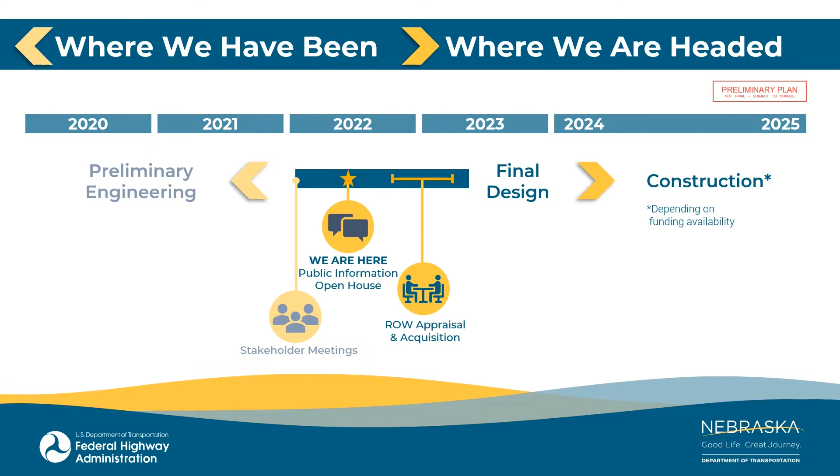Identified as US-34 North and South Seward, the proposed project would reconstruct approximately 1.1 miles and resurface 0.4 miles of N15, also known as 6th Street. The reconstruction segment would build a new concrete roadway starting just south of the Burlington Northern Santa Fe Railroad crossing and extend north to just beyond the intersection of N15 and North Avenue. This segment of the project would also include reconstruction of the curb inlets and storm sewer, pedestrian facilities, and updating or replacing roadway lighting and traffic signals. Existing utilities would be reconstructed or relocated as needed.

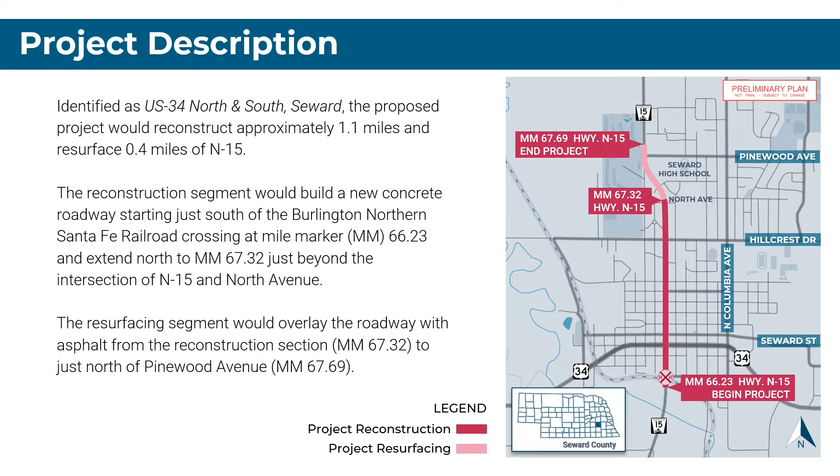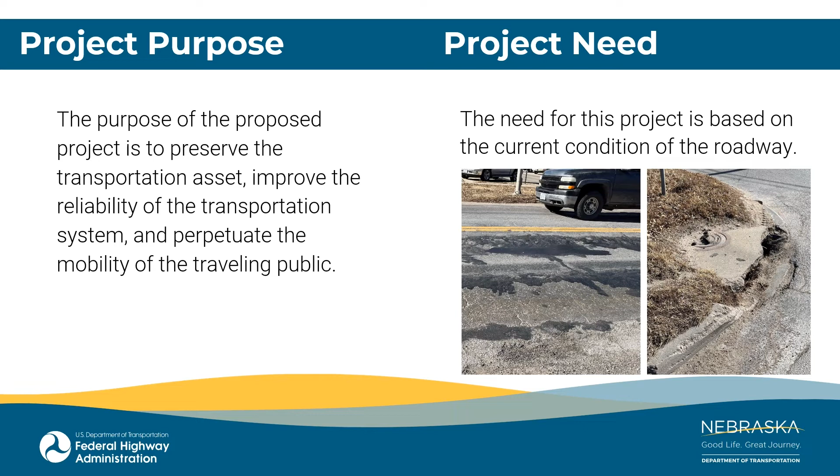The resurfacing segment would overlay the roadway with asphalt from the reconstruction section to just north of Pinewood Avenue. The planned construction in the resurfacing segment would consist of concrete pavement repairs and resurfacing the roadway and surface shoulders where present. The purpose of the proposed project is to preserve the transportation asset, improve the reliability of the transportation system, and perpetuate the mobility of the traveling public. The need for this project is based on the current condition of the roadway.

Now we'll be walking through the proposed improvements on N15. Typical sections are a cross-section or a driver's perspective when looking at the roadway. These sections represent a driver moving through the corridor from south to north. From Ash Street to South Street, N15 would be fully reconstructed as an urban curb and gutter section. A single lane of traffic would be constructed in each direction, as well as new sidewalks on both sides of the street. The existing elevated sidewalk on the east side would remain in place. Traveling lanes are shown here in blue. The gold represents an imprinted concrete with a brick pattern. The proposed roadway would be 32 feet wide from back of curb to back of curb as it is today.

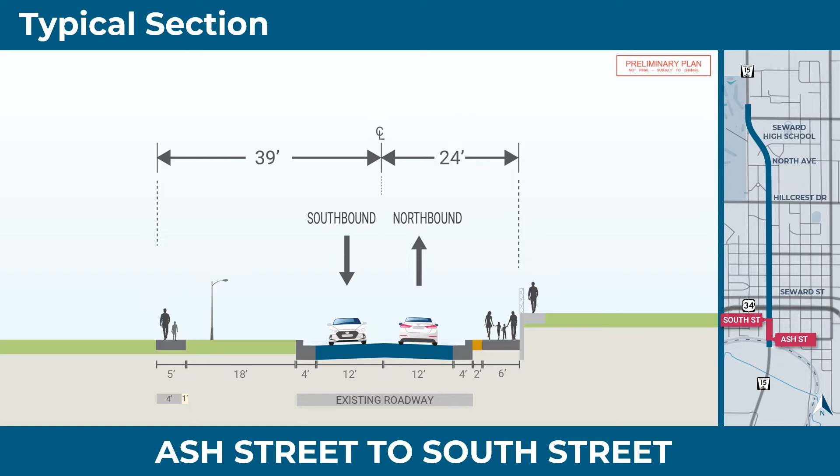From South Street to Jones Bank or City Hall, N15 begins to widen to allow for a turn lane in the following section. A single lane of traffic would be constructed in each direction as shown in blue. Existing sidewalks would be maintained as shown in light gray. The proposed roadway would be 55.5 feet wide from back of curb to back of curb as it is today. Parking would be included as it is today. However, the reconfiguration of parallel parking would eliminate 3 stalls within this section, 1 stall on the west and 2 stalls on the east side of the street.

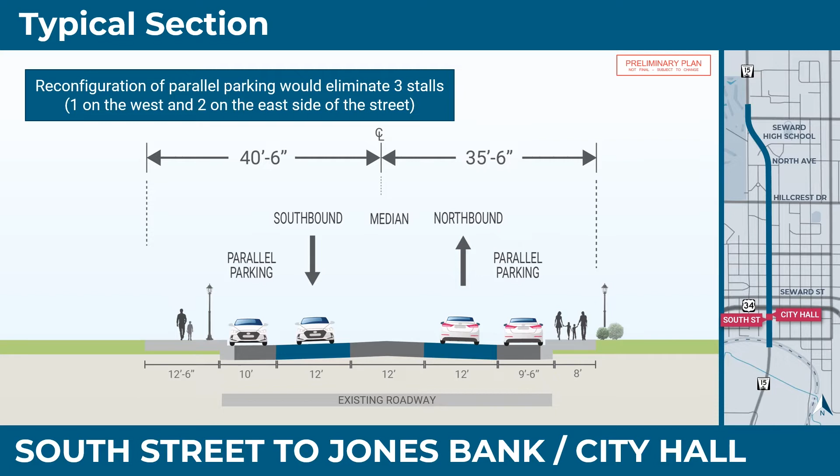From Jones Bank or City Hall to US-34, a left turn lane would be incorporated. A single lane of traffic would be constructed in each direction as shown in blue. The existing right turn lane would be eliminated and, in general, parallel parking on both sides of the street would be included as it is today. Existing sidewalks would be maintained as shown in light gray. The proposed roadway would be 64 feet wide from back of curb to back of curb as it is today.

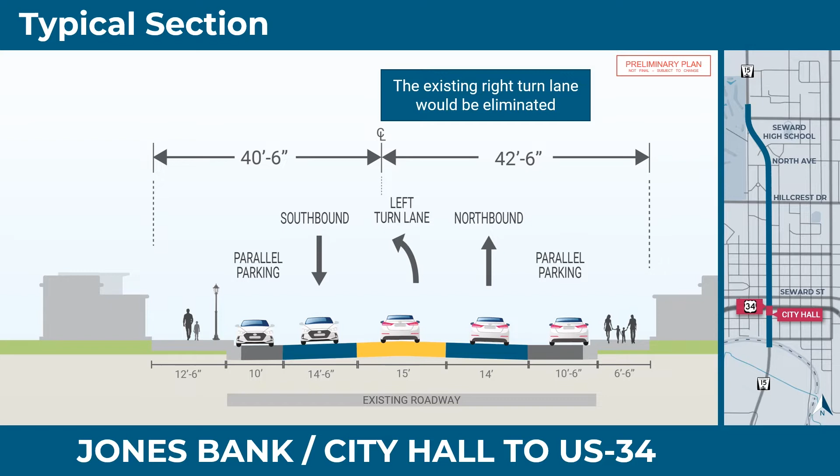From US-34 to Seward Street, a left turn lane would be incorporated. A single lane of traffic would be constructed in each direction as shown in blue. On the west, parallel parking would be included as it is today. On the east, parallel parking would be converted to diagonal parking. Existing sidewalks would be maintained as shown in light gray. The proposed roadway would be 68 feet 4 inches wide as it is today.

Configuration of parallel parking would eliminate 1 stall on the west side of the street. Diagonal parking would provide the same number of stalls on the east side of the street.

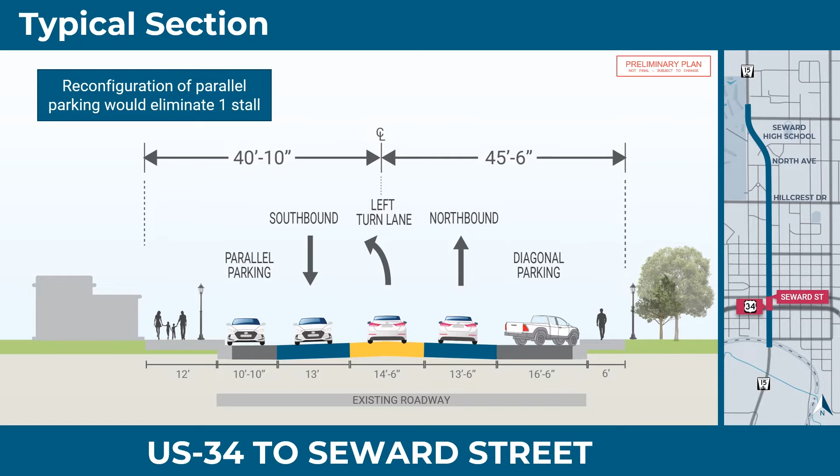From Seward Street to Jackson Avenue, a left turn lane would be incorporated. A single lane of traffic would be constructed in each direction as shown in blue. Existing sidewalks would be maintained as shown in light gray. The proposed roadway would be 54 feet 8 inches wide from back of curb to back of curb as it is today. Parking would be included as it is today.

However, reconfiguration of parallel parking would eliminate 3 stalls, 1 stall on the west and 2 stalls on the east side of the street.

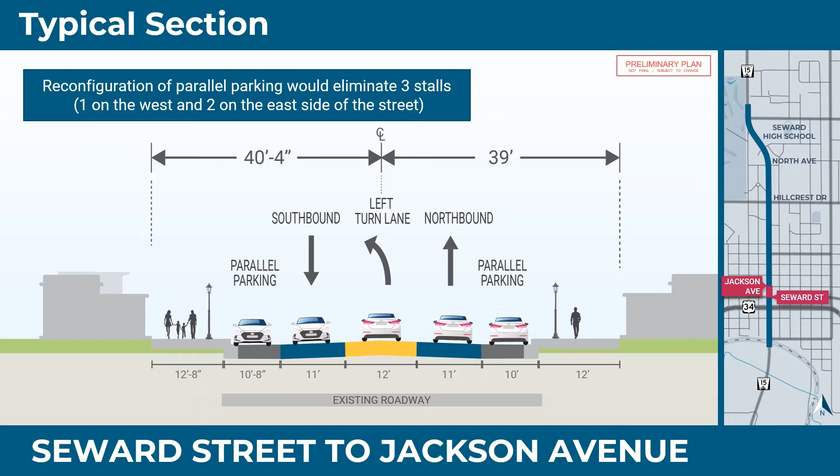From Jackson Avenue to Hillcrest Drive, N15 would be fully reconstructed as an urban curb and gutter section. A single lane of traffic would be constructed in each direction with the addition of a common left turn lane. New sidewalks would be constructed on both sides of the street.

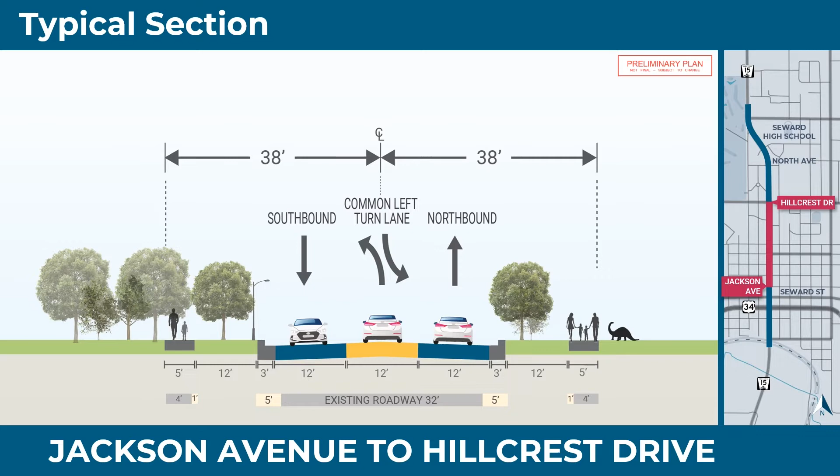The proposed roadway would be widened from 32 feet to 42 feet from back of curb to back of curb. This is an increase of 5 feet on each side of the road. This is to accommodate the common left turn lane. Essentially, proposed improvements would be contained within the footprint of the existing sidewalks.

From Hillcrest Drive to North Avenue, N15 would be fully reconstructed as an urban curb and gutter section. A single lane of traffic would be constructed in each direction with the addition of a common left turn lane. New sidewalks would be constructed on both sides of the street. The existing parallel parking would be eliminated to accommodate the common left turn lane.

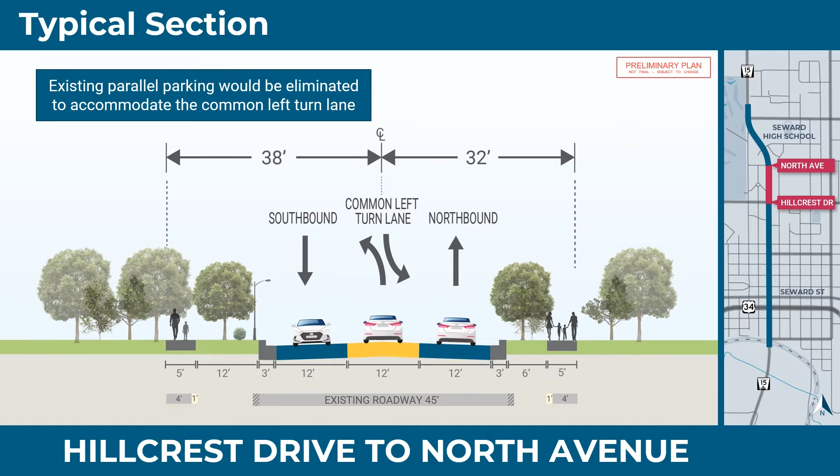The proposed roadway would be reduced from 45 feet to 42 feet from back of curb to back of curb. That is an elimination of 1 1/2 feet on each side of the road. This is to match the adjacent sections. From North Avenue to the end of the project, the roadway would be resurfaced within the existing roadway footprint.

Now we will walk through the plan view of the proposed improvements for N15. A plan view is a bird's eye view of the roadway. Note that north is to the right. Again, we'll be moving through the corridor from south to north. The legend is shown in the upper left-hand corner.

Proposed reconstruction for pavement and drives are shown in red. Proposed resurfacing for pavement is shown in pink. Proposed sidewalk improvements are shown in yellow. Proposed imprinted concrete with a brick pattern is shown in gold. Proposed green space additions are shown in lime green. Proposed stormwater system improvements are shown in gray, and proposed tree removals are noted along the project.

From Ash Street to US-34, N15 would be fully reconstructed as an urban curb and gutter section. A single lane of traffic would be constructed in each direction. A northbound left turn lane would be incorporated at the intersection with US-34. Parallel parking would be available between South Street and US-34 on both sides of the street, and the stormwater drainage system would be improved.

New continuous LED roadway lighting would be installed from Ash Street to South Street, and from South Street to US-34, the existing ornamental lighting would be used in place. The traffic signals at the intersection of N15 and US-34 would be modified.

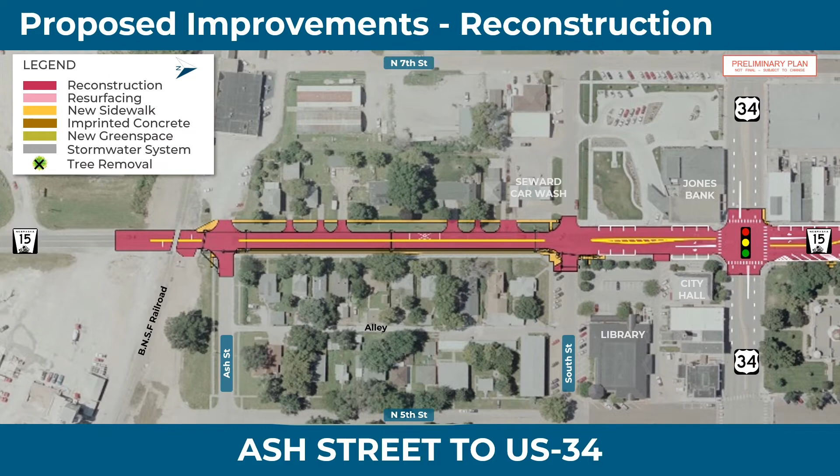From US-34 to Roberts Street, N15 would be fully reconstructed as an urban curb and gutter section. A single lane of traffic would be constructed in each direction. Northbound left turn lanes would be incorporated at the N15 intersections with Seward Street and Jackson Avenue. Southbound left turn lanes would be incorporated at the intersections of US-34 and Seward Street. A common left turn lane would be incorporated north of Jackson Avenue.

On the west side, parallel parking would be available between US-34 and Jackson Avenue. On the east side, diagonal parking would be available along the Courthouse Square. Parallel parking will also be available between Seward Street and Jackson Avenue on the east. The existing driveway access at Fastmart would be reconfigured as shown by the addition of new green space and imprinted concrete. The stormwater drainage system would be improved.

However, the existing stormwater system would be used in place between US-34 and Seward Street. The existing ornamental lighting would be used in place from US-34 to Jackson Avenue, and new continuous LED roadway lighting would be installed north of Jackson Avenue. Traffic signals at the intersection of N15 with Seward Street would be removed and new signals installed.

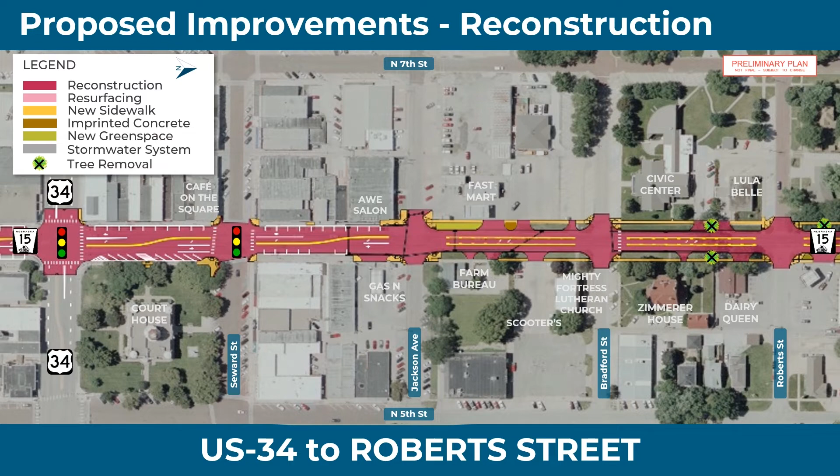From Roberts Street to Cedar Street, N15 would be fully reconstructed as an urban curb and gutter section. A single lane of traffic would be constructed in each direction. A common left turn lane and new continuous LED roadway lighting would be incorporated through this entire section. The existing driveway access near Subway would be reconfigured as shown by the addition of new green space. The stormwater drainage system would also be improved, including improvements to Cedar Street Detention Pond.

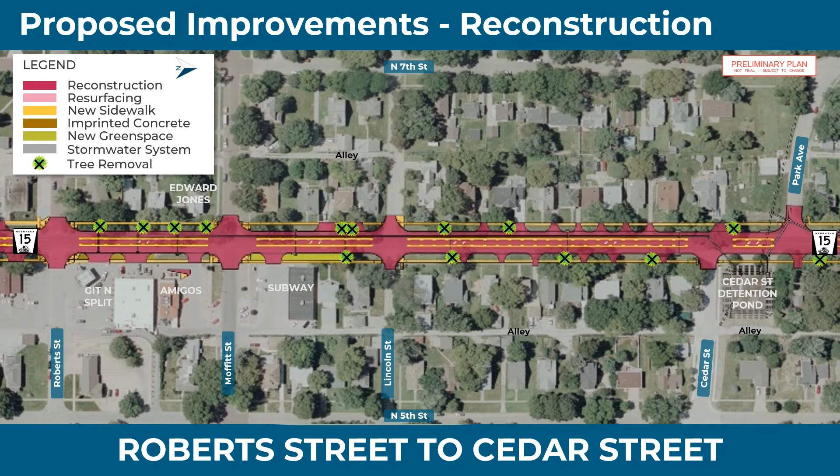From Cedar Street to 6th Avenue, N15 would be fully reconstructed as an urban curb and gutter section. A single lane of traffic would be constructed in each direction. A common left turn lane and new continuous LED roadway lighting would be incorporated throughout this entire section.

The existing parallel parking from Hillcrest Drive to North Avenue would be eliminated. Green space would replace existing concrete as needed in areas between the sidewalk and back of curb. This is shown by the addition of new green space on the east side of 6th Street north of Hillcrest Drive. The stormwater drainage system would also be improved.

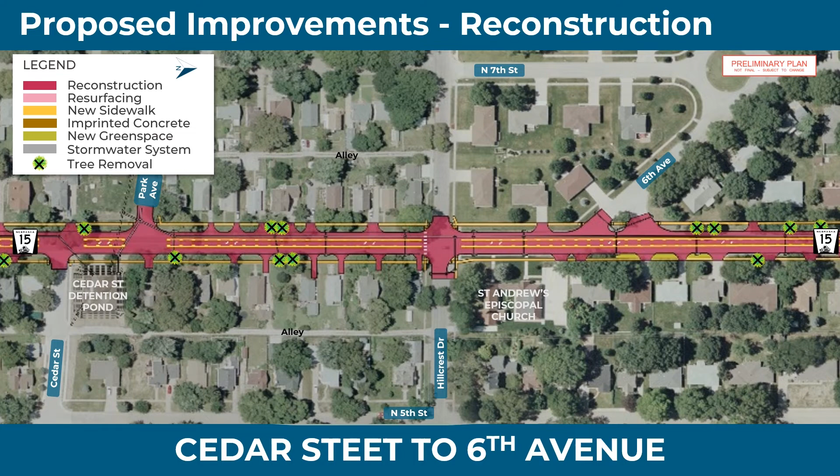From 6th Avenue to Northern Heights Drive, the fully reconstructed section continues to North Avenue, including a single lane of traffic in each direction and a common left turn lane, and new continuous LED roadway lighting would be incorporated throughout this entire section. The stormwater drainage system would also be improved south of North Avenue.

From North Avenue to the end of the project, the existing roadway would be resurfaced within the existing roadway footprint. Pavement would be restriped to accommodate a southbound left turn lane at North Avenue and Northern Heights Drive, which is the entrance to Seward High School. Pavement would be restriped to accommodate a northbound left turn lane at Circle Drive. ADA curb ramps would be constructed along the resurfacing portion of the project.

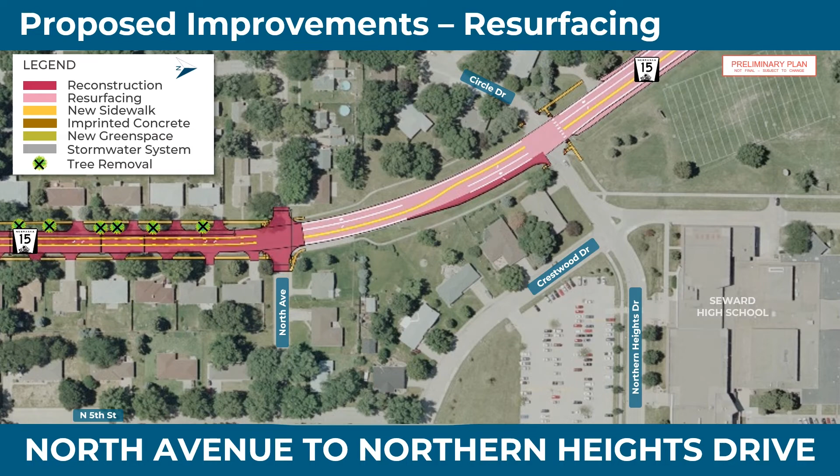Pavement would be restriped to accommodate a northbound left turn lane at North 8th Street. A right turn lane onto Pinewood Avenue would be provided for northbound traffic. New continuous LED roadway lighting would be incorporated to Pinewood Avenue.

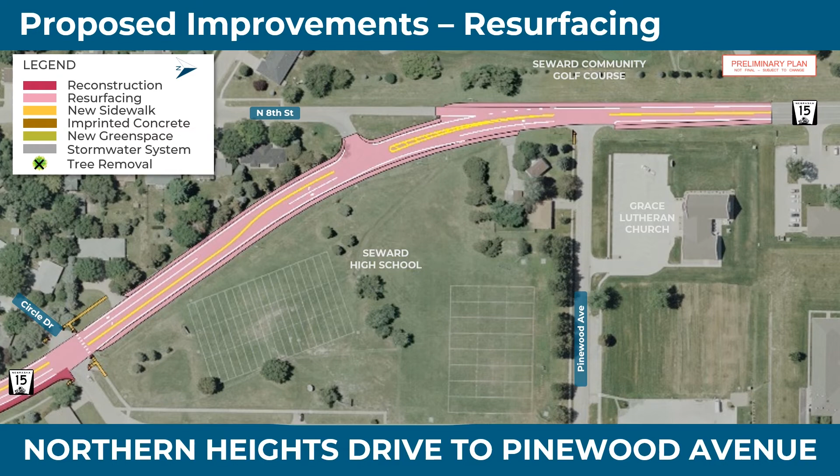Phase 1 construction from Ash Street to US-34 would be completed first to allow N15 south of US-34 to be reopened to traffic for the remainder of the project construction. A designated detour for highway traffic south of US-34 would be provided utilizing Izaak Walton Road, 294th Road, and US-34.

Northbound N15 traffic would be directed to take Izaak Walton Road west to 294th Road, then north to US-34, and then east on US-34 before continuing north on N15. Southbound N15 traffic would be directed to take US-34 west to 294th Road, then south to Izaak Walton Road, then east on Izaak Walton Road before continuing south on N15.

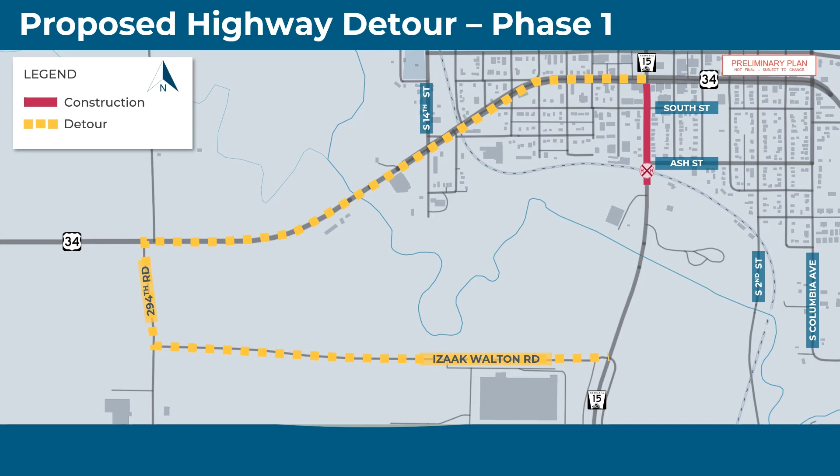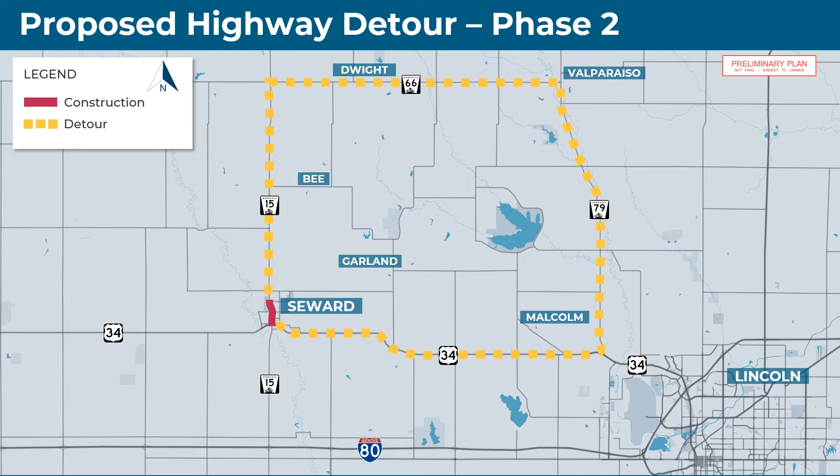The designated detour for highway traffic north of US Highway 34 would be provided using US 34, Nebraska Highway 79, and Nebraska Highway 66. Highway traffic would be detoured by US 34 on the south, N79 on the east, and N66 on the north. During Phase 2 construction, local southbound traffic would be maintained on N15 north of US 34.

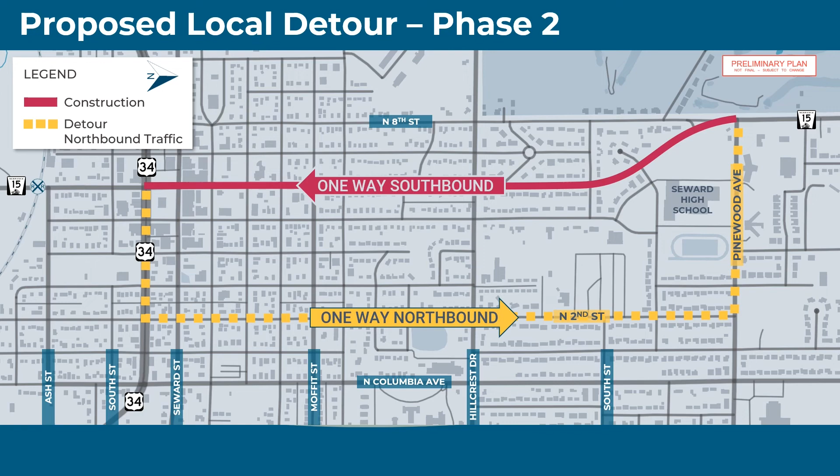On this slide, note that north is to the right. A designated detour for local northbound traffic north of US 34 would be provided utilizing 2nd Street between US 34 and Pinewood Avenue. Northbound N15 traffic would be directed to take US 34 east to 2nd Street, then north to Pinewood Avenue, and then west on Pinewood Avenue before continuing north on N15.

Now, we will discuss historic properties. Section 106 of the National Historic Preservation Act requires federal agencies to consider the effects of actions on historic properties. That can include any prehistoric or historic district, site, building, structure, or object eligible for or already listed on the National Register of Historic Places.

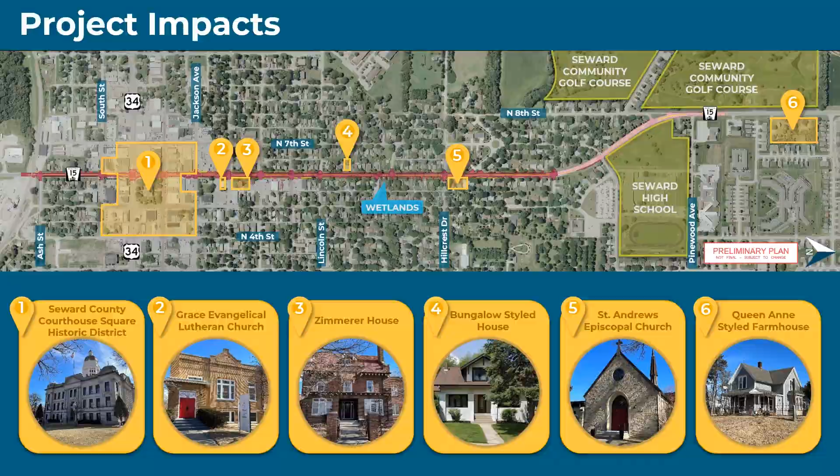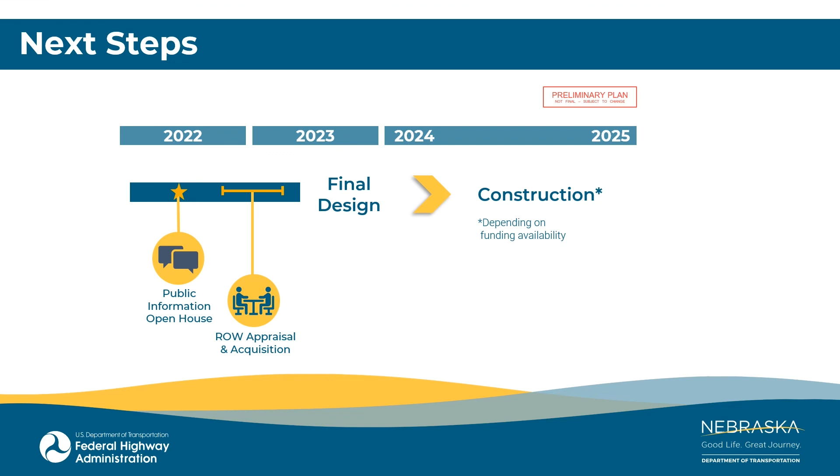Trees would be impacted, and removals would be required. The storm sewer trunk line would run under the street rather than behind the curb to minimize damage to existing tree roots. Following today's meeting, NDOT will review and consider the input received as they proceed with final design, right-of-way appraisals, and acquisitions, depending on construction funding availability.

NDOT wants to hear from you. There are 3 ways you can provide your comments and input. Leave your comment sheet with us today before you leave. You can send an email to tony.bui@nebraska.gov or by U.S. mail by sending it to Tony Bui, NDOT Public Involvement, P.O. Box 94759, Lincoln, Nebraska 68509-4759. Please note, the comment sheets that have been provided are prepaid and you can take them with you. All comments are requested by May 13th, 2022 to be included in the project record.